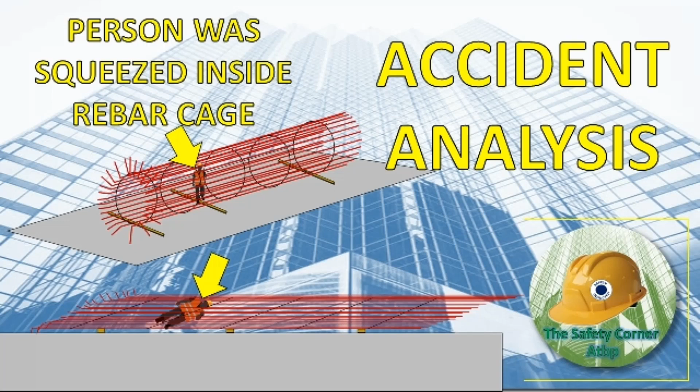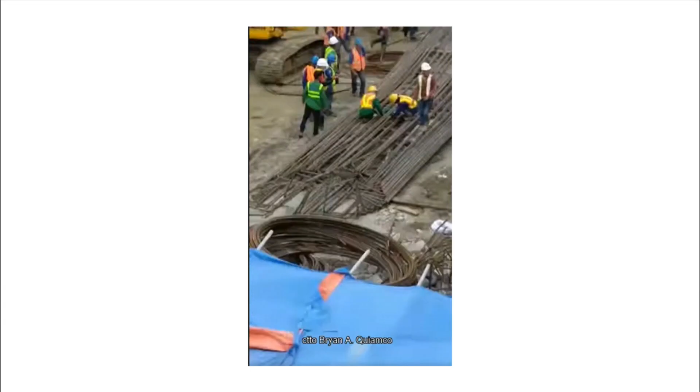Hello guys, today I would like to discuss the accident analysis of a construction site. So first, please watch this video so that you have an idea what this accident I'm talking about is.

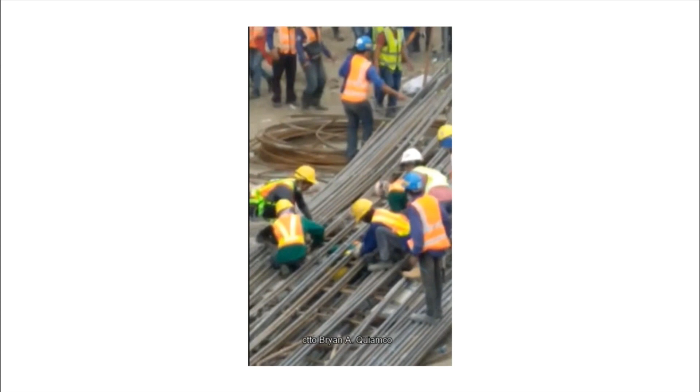As you can see, a worker was trapped inside of the steel cage while his colleagues are trying to rescue him, removing him from the steel cage.

Remember guys, every accident has a cause. It's not just happening. There is always a cause. There are always mistakes and lapses from everyone, either the workers, the supervision, or in the system.

So they are trying to lift up the steel bars so that they can remove the person under the steel bars. The problem, the sling belt is not enough to support the steel bars. It may snap anytime due to the heavy loads, and they use the excavator to lift the steel cage, and this is also an additional hazard after the incident.

So it is very crucial in construction that before you start any activity, you need to analyze what are the risks, what are the hazards that may occur, or existing hazards that will trigger an unacceptable accident. Because if something happens, as you can see here, a lot of workers are standing, they don't know what to do, so they are just watching.

So this is a very unacceptable accident. I don't exactly know what happened to this worker, if he survived or he only got injured, but even if he only got injured, this is unacceptable. All accidents are preventable if you prepare, if you plan to prevent accidents, to perform your job safely, then this will not happen.

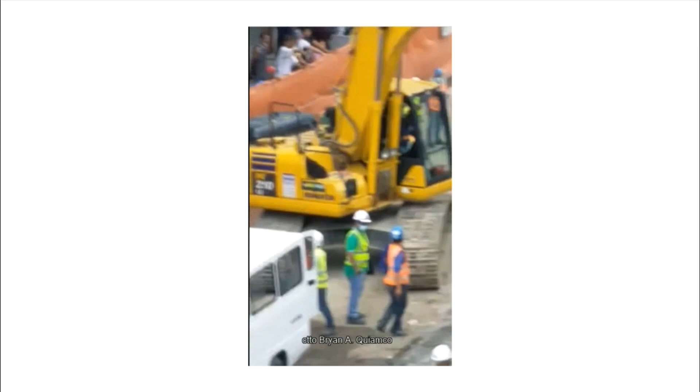So they make additional measures. They want to remove the steel bars by cutting the steel. But the fire also introduced additional risk to the person inside of the steel cage. See, as you can see, the spark is spreading even on the workers.

I hope that these workers survive this tragedy, because if not, additional workers will be gone because of our failure. So as you can see, there is one laborer also, another person injured, already rescued and brought to the emergency vehicle.

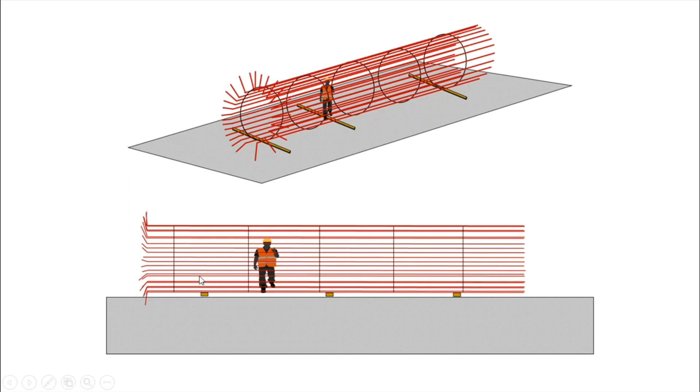Okay, the problem here is they forgot to provide additional supports. As you can see here in the top, the black color line is the stirrups, and the maroon line represents the main rebars. And this rectangular box underneath the steel is the timber that's supporting the steel cage.

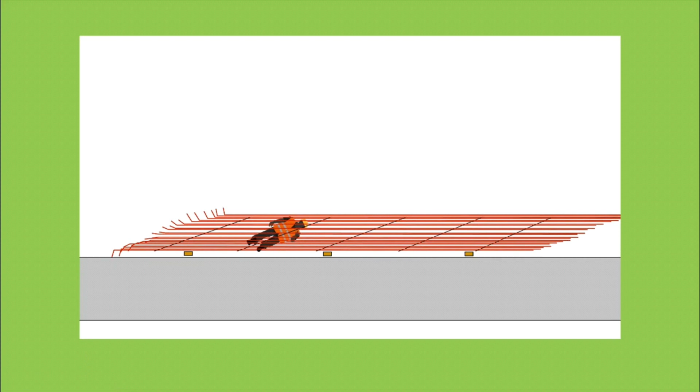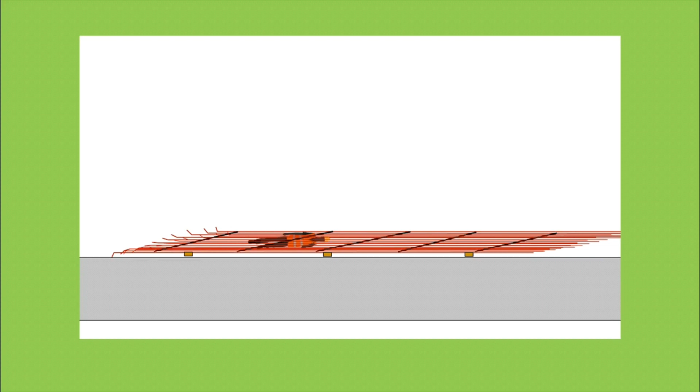Okay, I made a video sketch of how this accident happened. Please watch. So you can see gradually from its original position, the unstable steel cage is twisting, going to the right, where one worker was trapped inside of the steel cage. Okay, that is based on my observation of the video that I presented to you earlier.

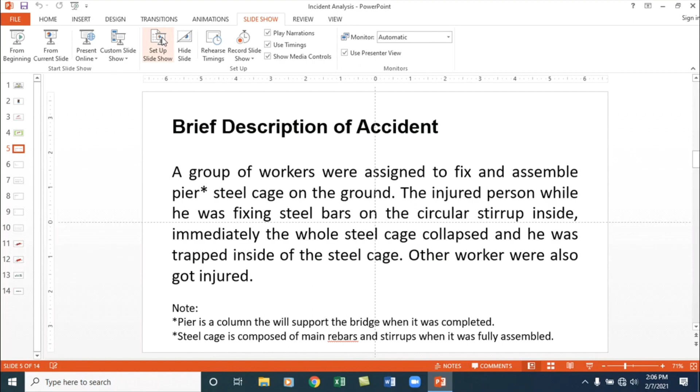Okay, so based on the video, I developed a brief description of the accident. A group of workers were assigned to fix and assemble a pier steel cage on the ground. The injured person was fixing steel bars on the circular stirrup inside when suddenly the whole steel cage collapsed and he was trapped inside of the steel cage. Other workers also got injured in this incident.

Please note, the pier is a column that will support the bridge when it is completed. And the steel cage is composed of main rebars and stirrups, which are tied by steel wire when it is fully completed and assembled.

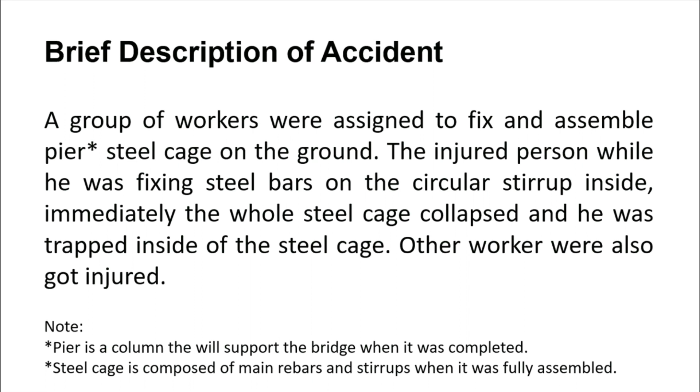So the immediate cause of this: unsafe acts, not providing a safe system of work. As you can see in the video, it's very clear that there's no safe system of work provided in the steel cage assembly or fixing of the steel cage. Or if they have a safe system of work, they are not following it. Even if they have a safe system of work, if they fail to follow it, then an accident may also happen.

And if they don't have a safe system of work, or if they're not following it, it's because the supervision is not competent to handle such a job. He doesn't know if his workers are working in a safe manner or as per the safe system of work. So that is the immediate cause and unsafe acts that may happen in that incident.

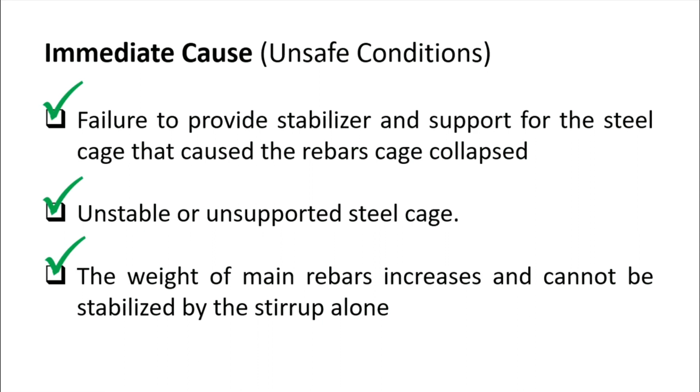Another immediate unsafe condition: the weight of the main rebars increases over time as the work progresses and cannot be stabilized by the stirrups alone. The stirrups are usually around 12 mm rebars or steel bars, either spiral or tied. These stirrups cannot sustain the weight of the rebars. For example, if the weight of the rebars is around 1 ton, it cannot be sustained by the stirrups alone. So these are the immediate causes and unsafe conditions that I have found in this video.

But we could find more unsafe conditions and immediate causes if we visited the site personally and saw everything there. Based only on this video, I will provide these immediate causes. Another is the root cause, personal factors. As I mentioned before, incompetent supervision. The supervisor is not competent enough to predetermine the hazards and take action to control those hazards or risks so that this accident will not happen. Okay?

Supervisors and workers have inadequate skills. They don't know what they are doing. They don't know the hazards present in their work and the risks of what they're doing. So they have no adequate skills. They lack skills and knowledge. As I mentioned, they don't know the safe procedures of their job. They don't know what is missing in their job.

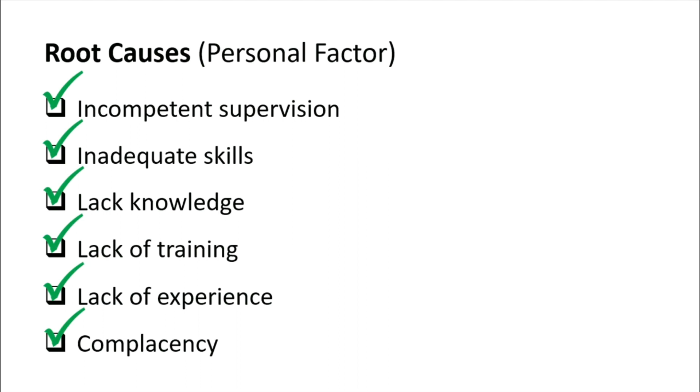But the issue is it only takes one accident, and because of this, there may be loss of life, loss of production, damage to your company image. Your job will be stopped because of accident investigations, police investigations, and a high cost of insurance premiums and payments for the injured persons and their families, because they cannot do the job as normal as before the accident happened. So all of these are losses, unacceptable losses because of this accident.

Another thing is root causes, or system factors. You cannot always blame the supervisor. You cannot always blame the workers because they don't know how to do the job. In our system, the system is the management. Do we have a safe system of work or safe work methodology and risk assessment for the job? Are you hiring competent persons to supervise the job, and are those people trained on the safe work method statement or methodology and risk assessment for that particular job?

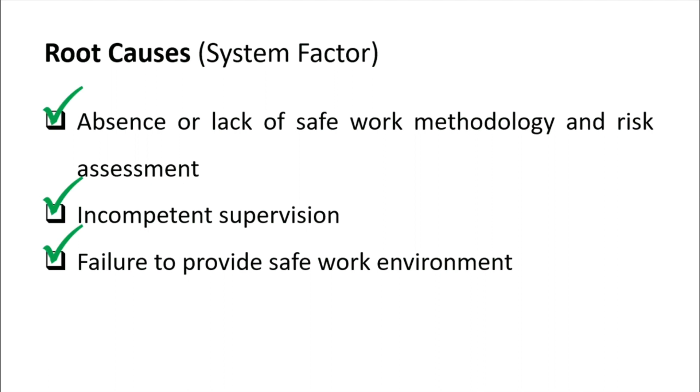And then the management failed to provide a safe work environment for its workers. Remember, accidents don't just happen. Every accident has a cause. These causes are the ones I'm discussing with you, the immediate cause and the root cause.

Okay, I developed suggested corrective and preventive action to prevent recurrence of this accident. First, develop safe methodology and risk assessment for the task. So from the very beginning, when you are planning for your job, take time, analyze, develop the safe system of work, step by step how you will do the job safely, and every single step of your methodology, analyze it.

What are the risks involved on each step, and what are the control measures that you will do to prevent this risk or accident to happen on this particular job. And if you are happy and your method statement and risk assessment is sufficient and suitable, then implement your safe methodology and risk assessment.

Prepare structural analysis and design for temporary works. Temporary works is everything that is temporary at the project. Okay, so you need to get the structural engineering or engineering department involved to provide design for all temporary works, like the support of this steel cage, and make sure that this is as per the design and as per the structural code of the Philippines. So in doing this, you are preventing such accident.

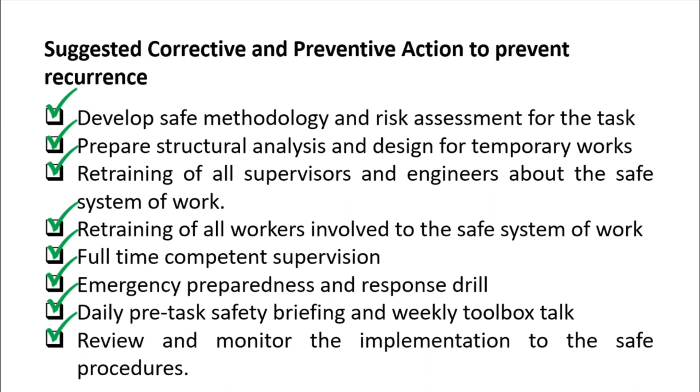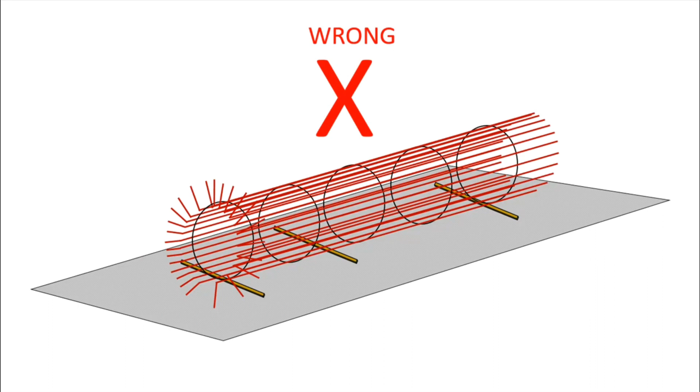So I made a sketch of this. This is what happened in this incident. They had the cage, and it was supported only by timbers underneath on the ground, which is totally unsafe. I made a sketch based on my experience, because I have handled many similar steel cage jobs, and thank God, until now nothing unacceptable has happened.

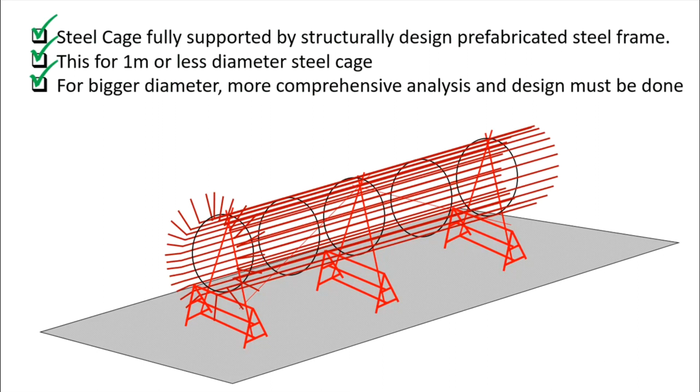Okay, this sketch I prepared is only for steel cages of 1 meter diameter or less. For bigger diameters, which are heavier, a more comprehensive structural analysis and design must be done before the start of the job. And as I said on the previous slide, make sure that all the procedures, safe system of works, methodology or risk assessment are understood and followed by our team.

Okay guys, I hope that you got something from me, and I hope that we can learn from this accident. Don't experience an accident yourself, because it's very painful. Learn from other accidents and avoid this accident.